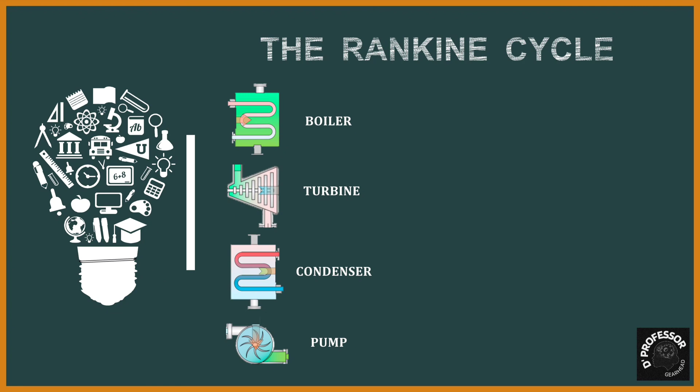The boiler, which is also known as the steam generator, is used to produce high-pressured steam so that the plant can generate electricity. So the boiler's primary function is to convert water into steam by applying heat energy generated from burning fuels such as coal, natural gas, or nuclear reactions, or from geothermal or solar sources. Water is heated in the boiler to generate high-pressure steam. This steam typically exits the boiler at high temperatures and pressures.

Turbine is a machine that plays a key role in transforming fluid energy into usable work or electricity. The turbine converts the thermal energy of high-pressured steam into mechanical work, which is the rotational energy. High-pressured steam from the boiler enters the turbine and expands through the turbine blades, causing the turbine rotor to spin. As the steam expands and loses pressure, its temperature and energy decrease.

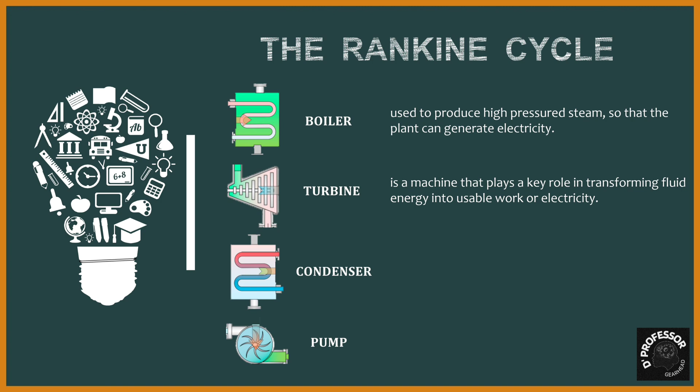Condenser. It is used to condense the exhaust steam from the turbine for reuse in the cycle and to maximize turbine efficiency by maintaining proper vacuum. The condenser condenses the exhaust steam from the turbine into liquid water to be reused in the boiler.

Low-pressure steam, also known as the exhaust steam, from the turbine enters the condenser where it comes into contact with the cooling water, often from a cooling tower or a body of water, which is the seawater. The cooling water absorbs heat from the steam, causing it to condense into liquid water at a lower temperature and pressure. Last component will be the pump.

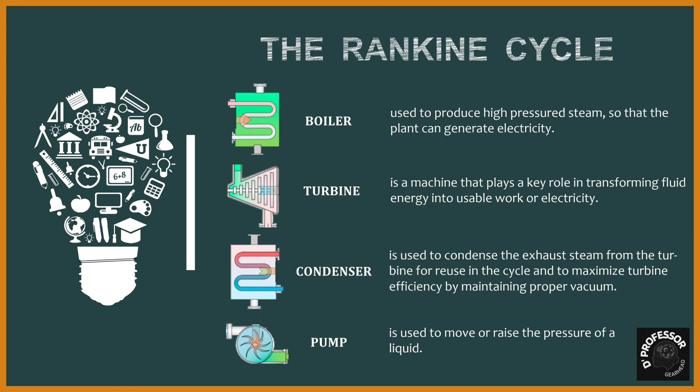It is used to move or raise the pressure of a liquid. The pump, often called a feed water pump, pumps condensed liquid water from the condenser back into the boiler to be reheated and reused. The pump increases the pressure of the liquid water, which is the condensate, to the pressure required by the boiler. This ensures a continuous flow of water through the cycle.

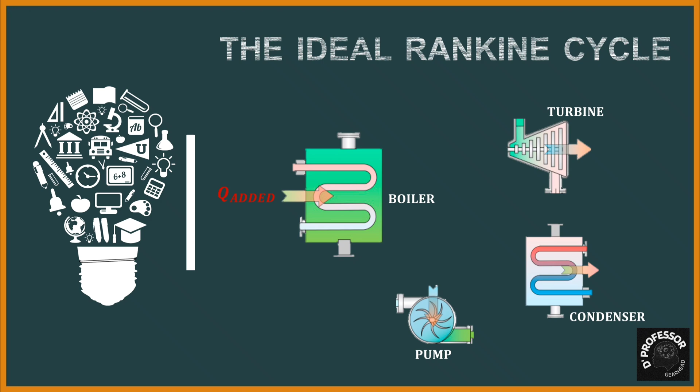Okay, for the ideal Rankine cycle, let's review the four major equipment. First one, the boiler. Next will be the turbine. Next is the condenser. And here is the pump. Again, the cycle starts with the boiler. The boiler's primary function is to convert water into steam by applying heat energy, also known as heat addition, generated from burning fuels. Water is heated in the boiler to generate high-pressured steam.

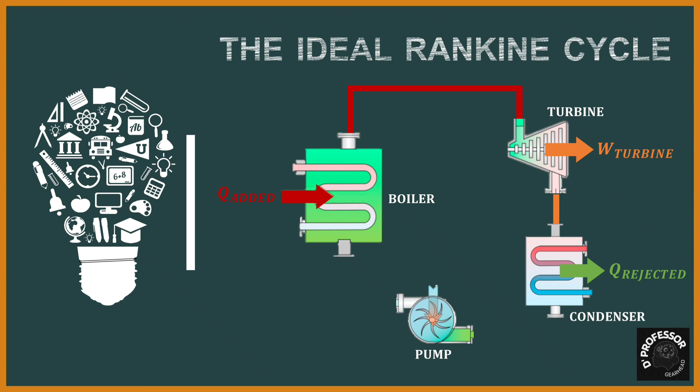High-pressured steam from the boiler enters the turbine and expands through the turbine blades, causing the turbine rotor to spin, which generates the turbine work. Low-pressure steam, or the exhaust steam from the turbine, enters the condenser where it comes into contact with the cooling water. That low-pressure steam will reject its heat with the help of the cooling water, causing it to condense into liquid water at a low temperature and pressure.

With the help of the pump work, the pump pumps condensed liquid water from the condenser back into the boiler to be reheated and reused. The pump increases the pressure of the liquid water, which is the condensate, to the pressure required by the boiler.

This ensures a continuous flow of water through the cycle. Okay, let's plot the points needed in the Rankine cycle. Point 1 will be the superheated steam entering the turbine. Superheated steam refers to the steam that has been heated to a temperature above its saturation point at a given pressure. In other words, it is steam that exceeds a temperature higher than the boiling point corresponding to its pressure.

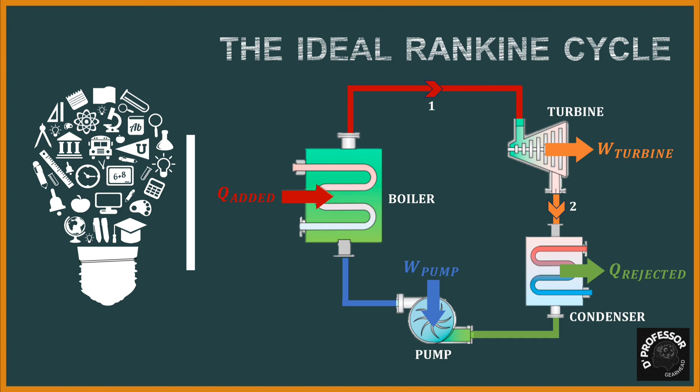Point 2 will be the wet steam at the exit of the turbine. After expanding through the turbine, the steam is typically in a wet steam condition. This means it is not fully vapor nor fully liquid but rather a mixture of both phases. The quality of the steam at the turbine exhaust, which is the mass fraction of vapor in the mixture, ranges between 0 to 1. Typically, the quality at turbine exhaust is close to 1 but less than 1 due to some degree of condensation during expansion.

Point 3 will be the saturated liquid at the exit of the condenser. Saturated liquid refers to a phase state where the substance is at its boiling temperature for a given pressure. In the condenser, the temperature of the steam decreases as heat is removed, reaching the saturation temperature corresponding to the condenser pressure. At this point, further heat removal causes the steam to undergo phase change from vapor or gas to liquid, condensation.

Point 4 will be the compressed liquid at the exit of the pump, which is entering the boiler again. At the exit of the pump in the Rankine cycle, the substance is indeed in the form of compressed liquid. This state ensures efficient operation and continuous circulation of the working fluid through the cycle.

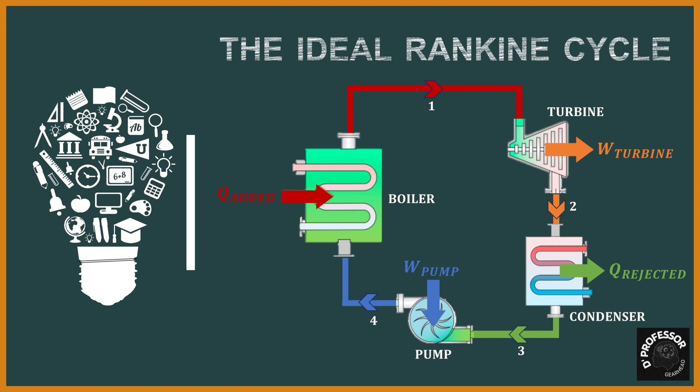When it comes to the Rankine cycle, ang palagi lang nating tatandaan will be the SPSP. Ano nga ulit ang tawag kapag constant ang S? Isentropic. How about if the P is constant? Isobaric. So let's review the formulas under isobaric process and isentropic process. Okay, let's review the summary of formulas using our table with our previous module. We have here the PVT relation, work non-flow, work steady flow, delta U, delta H, Q, and delta S.

So, unahin na natin si isobaric process. Pressure is constant. Ano nga ulit ang zero kapag isobaric process? We have the work steady flow. For the PVT relation, we have V1 over T1 is equal to V2 over T2. For the work non-flow, we have P times the quantity V2 minus V1. For the delta U, we have U2 minus U1. For the delta H, we have H2 minus H1.

And for the Q, since Q and delta H are equal when it comes to the isobaric process, our Q is also H2 minus H1. And for the delta S, we have S2 minus S1.